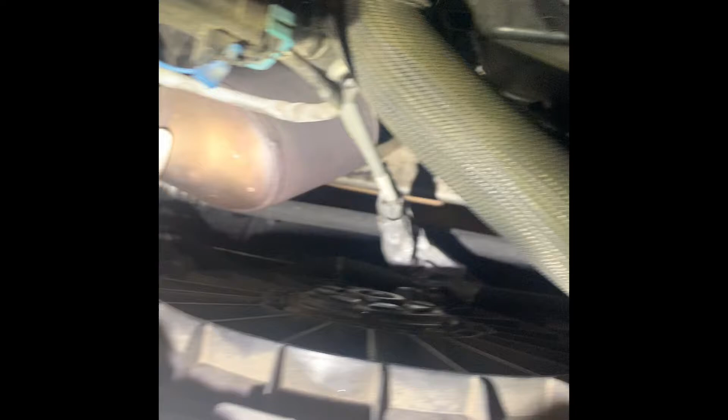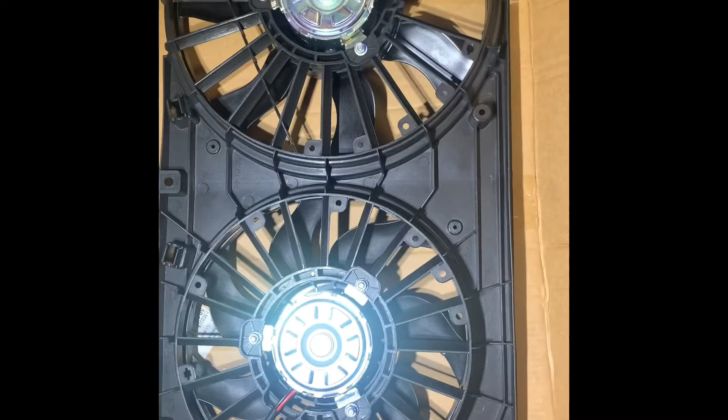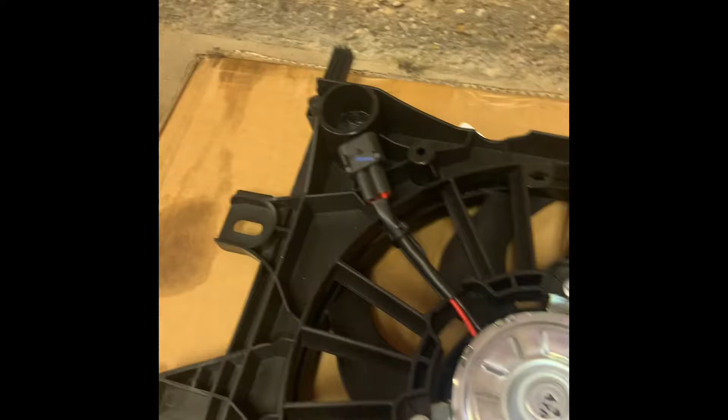620974. So basically this is what you're looking at, whereas this is the back side, so going that way, front of engine. It mounts at a few different spots. So you have the top here and the top there are very easy to get to. Those have these brackets, these hold down brackets. Right here. It only came with one, but I'm going to reuse one. They're just plastic parts, support brackets.

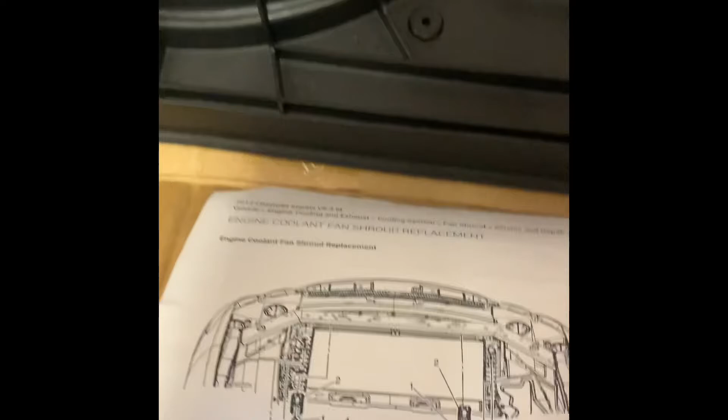So there's those two on top, and then looks like there's one here, one there, and then one up top center, and I believe that's it. Yeah, it looks like it's it. If there's anything else, I'll let you know. So to get to it, it's fairly easy.

I have, the thing with the 3.6 is you can get AC Delco part number PF63 or PF63E, and then I use K&N filters, so HP 2011 is the one that fits. The thing about getting PF63E or in my case HP 2011 is that it's an extra length on the filter, so it has more volume of filtrage, so you can pump more. You see how much clearance I have there, so not a lot. That's why I'm going to be doing an oil change while I'm doing this. It's a smart idea to just get them both out.

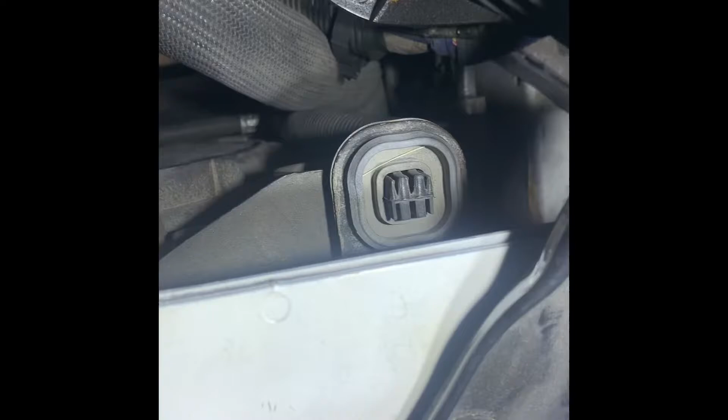To get this radiator out, you have to remove, so this is the front, and right there, that trans cooler line, lose some trans fluid. There's going to be a C-clip, I believe. So that, and then it bolts down there. I'll get a better shot later of where it goes down, but you can kind of see right there is where it starts from. It runs down there, and it goes off to around the corner there. So I might have to drop the splash shield to get closer to it. But yeah, you definitely have to remove that because that is solid aluminum. You can't do anything with that, and it's clearly in the way.

Now, you also have to remove this torque strut. That's fairly easy. I don't have the torque specs on hand, but yeah, to remove this torque strut, you would remove here, and here, here, here. You don't do anything with this. You just remove those two. Those four really. But yeah, so just the trans line that goes to the auxiliary.

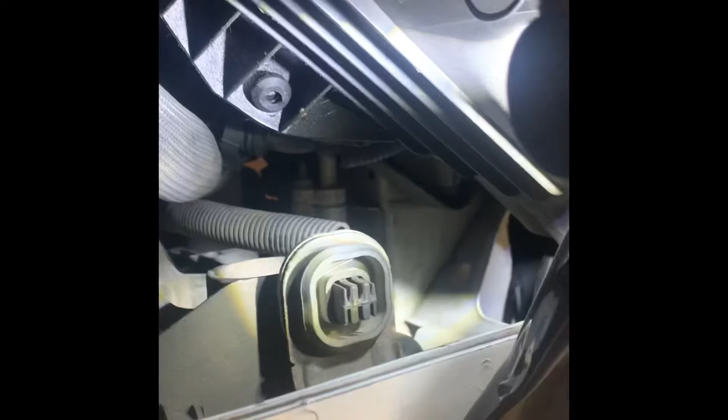This is a police package, so it has 3 different trans lines. You can see where those two are on the trans right there. There's one, and then the other one is in the rear. You can't see it, but if you have the one that goes all the way back there to the rear, that is for police package only. Because this thing right here is the auxiliary. So I actually got it easy today. When I replaced that line all the way to the back, that was a pain. It's very, very difficult to get that back in there. It's easier to get it out because you can mangle it and stuff. But yeah, so right here should be fairly simple.

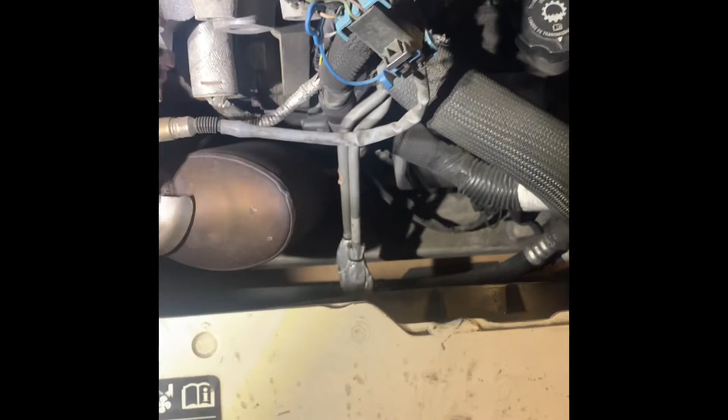I'm going to be removing the air box. I'm going to be removing the torque strut, and that should give me enough room. Yeah, and obviously the oil change. So first 2 steps, you got to remove this engine cover just to get it out of the way. To do that, you just unscrew this oil input cap, and then remove that, set it off to the side, and make sure you put that back on, so you don't lose it and we don't get contaminants into the crankcase.

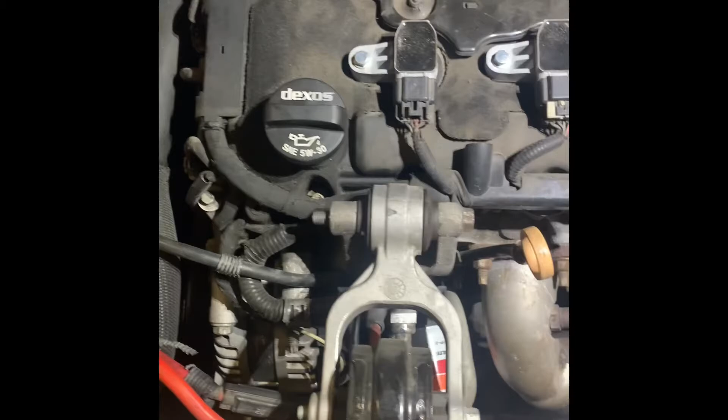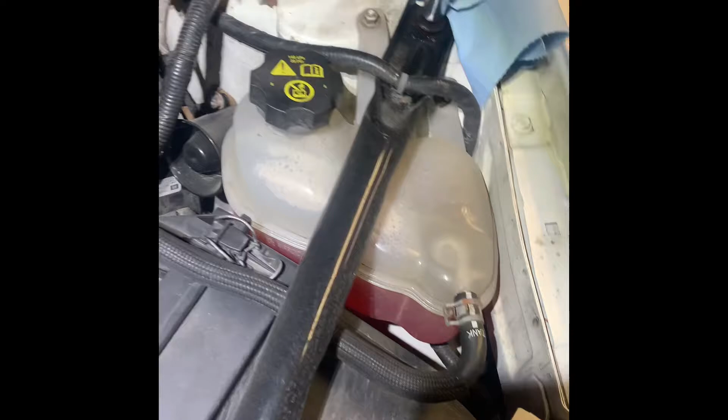And then we got this support bracket so we can remove the air intake. Step one would definitely be to get that support bracket off. That's either a 1/2 inch or a 13 mil. And I already cracked those bolts. You know, I use that Free-All to kind of clean up the threads and make it a little bit easier. Don't want to do that. So yeah, that should be all good.

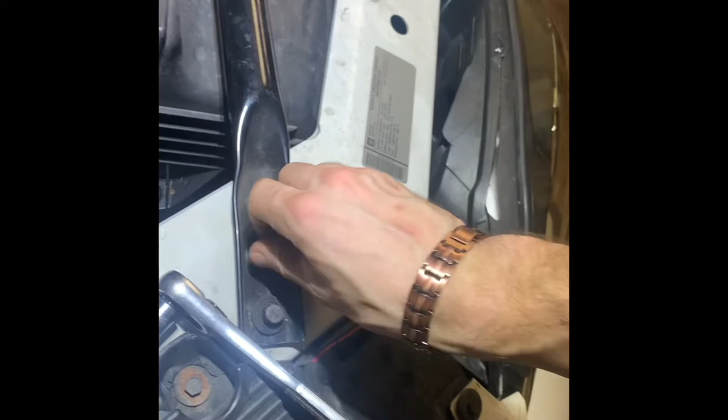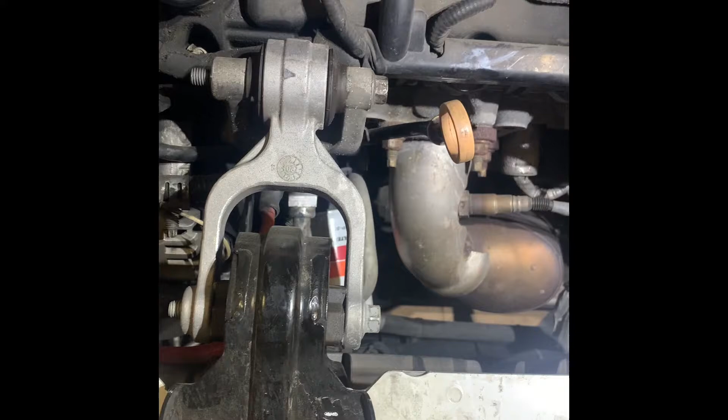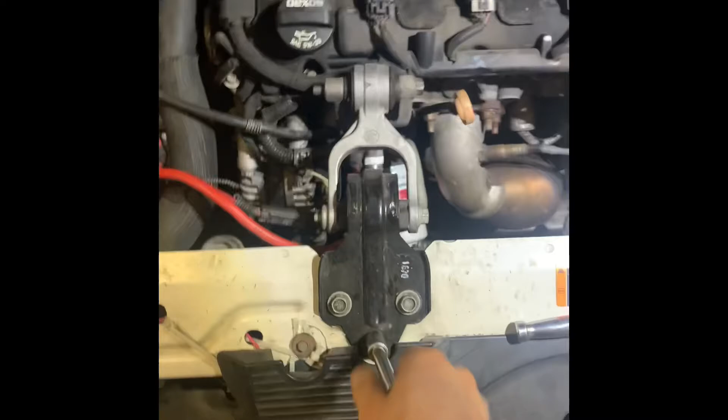There is this snap tab right here. I don't know what connector that is, but you gotta take that out. With the torque strut here, we have a 13 millimeter down below here, or a 1/2 inch. We have a 15 mil here, or a 9/16, along with that and that. Those are all 15 mils. And I already broke them loose. They're very easy to get to. Just remove them by hand.

I can do this one-handed. You can do it. You can do it. If Britney Spears can get through, what was that, 2011? You can do it. You should probably get a GoPro or something.

Anyway, so again, you want to keep these organized. We got the front out here. These are very long bolts. I'm going to keep the 3 of these together so I know where they came from. We got 3 bolts going with 3 bolts.

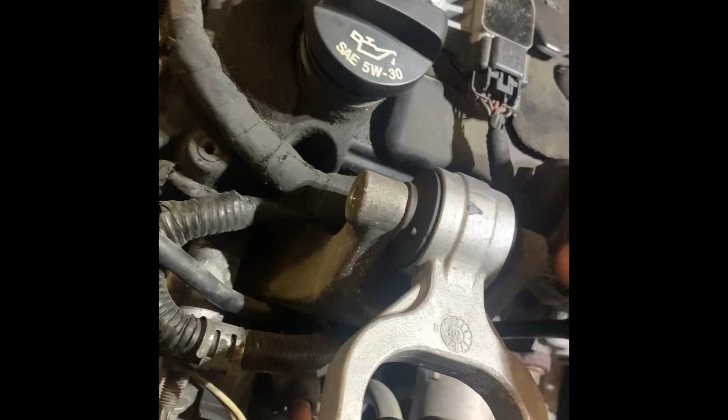And then for the top here, I got this swivel socket. It's only going to get easier. Should be out now. That's fairly easy. All I did was just break that loose and it should come right out. That slides out. That slides out.

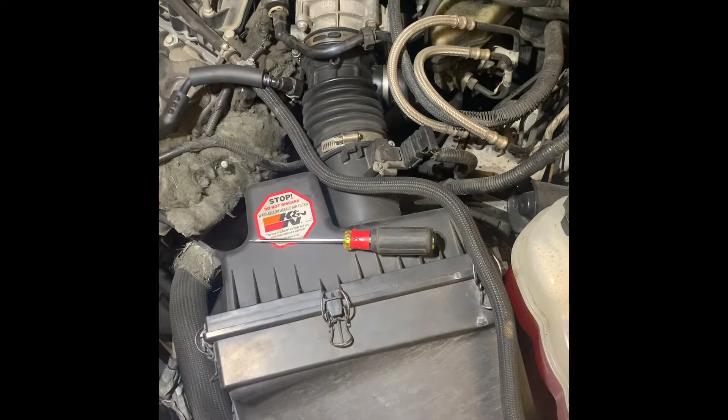Alright, to remove this air box, and I'm also going to be doing some different tune-up processes, we got to take off where it meets the throttle body. So right here, you just sneak in a flathead and get that rolling. I don't ever remove the purge valve solenoid. That connection is kind of a pain to get to, and it's right there, so I don't want to worry about it too much.

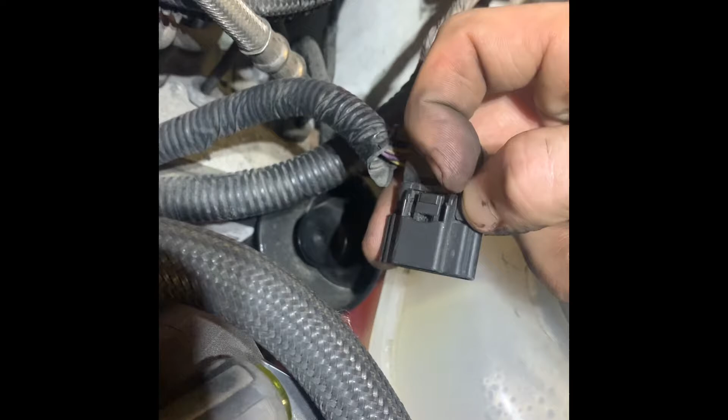Remove this little tab here. This is the PCV valve, so you would just click this little gray tab and slide that off, get it out of the way. And this is our mass airflow sensor. There's a tab on the back side. It's probably got one of those red guides, but it's broken off by now because, again, this is like, I don't know how many times, but you would just pull that red back, and then with the electronics on the left side, you're just going to click that tab, pull this off, and that should be it.

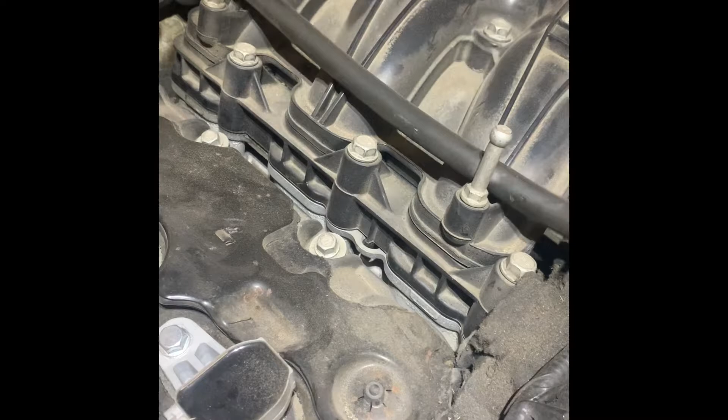Easiest way to do this, probably get this off so that the tube is removed from the throttle body. Make sure I'm not missing any steps here before we go into this. All right, so then we got 1, 2, 3. And this coolant inlet, the proper way it runs over that and under this. We can move it out of the way for this process here. Got everything removed. So we got that part of the box off. Setting it to the side.

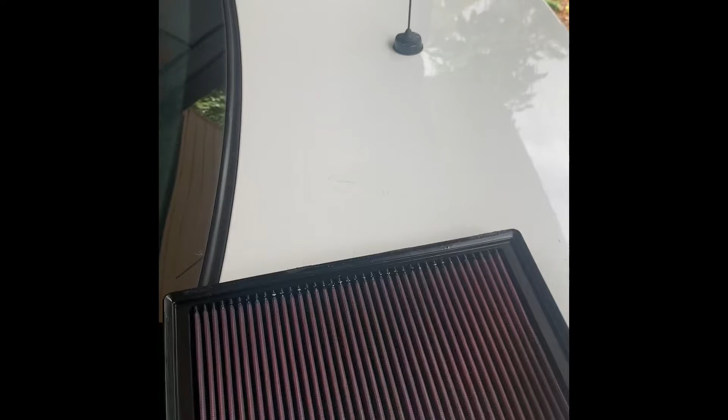And this is my reusable K&N air filter. I can see light through it. I'll probably run it for like 25,000 miles. I might clean it today, I'm doing all this other stuff. But yeah, it doesn't really need it. Just probably tap it out on a hard surface. It's my car. I can do what I want. That's how you get debris out of an air filter. Cool.

So, now this backside, it's got little grommets. I'm gonna just get it out of there. Those little grommets, 1, 2, 3. One of them's kind of messed up, but yeah. All right.

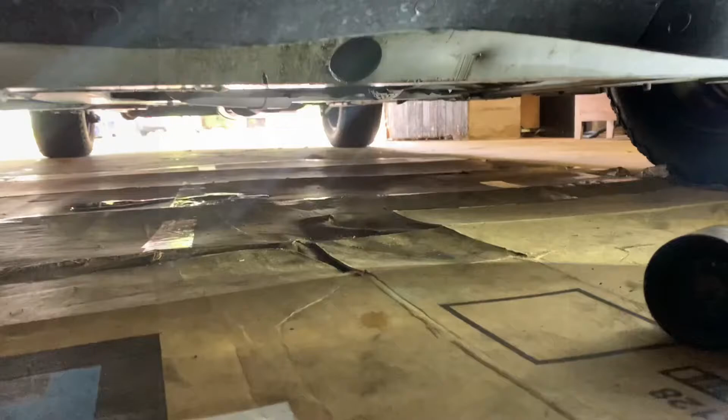Next thing I'm going to be doing is an oil change. Lifting on this vehicle is fairly simple. There's that circle right there. That is the subframe, also known as the cradle. And you're just going to position your jack on the flat surface behind there.

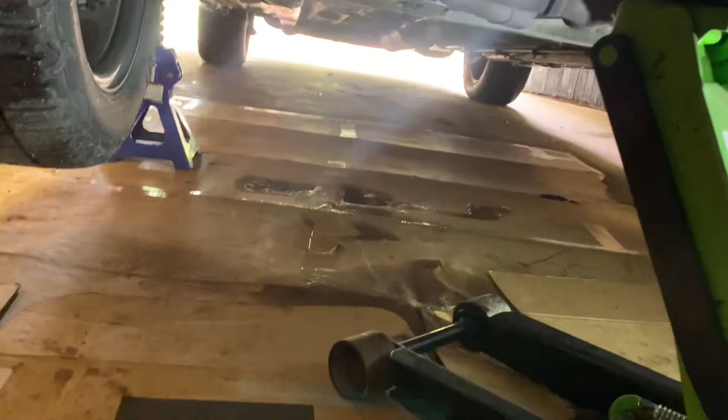So I'll show you here in a second where I position those two jack stands. It's always nice to put things in threes. Just gonna slowly let it down onto those jack stands. And it's still being supported at the front and the rear. Now the weight is on the jack stands as well, enough so that if the jack were to fail, it's still on those jack stands, but the weight is distributed. It's the same on the other side. The pinch weld is double bonded here. That's where you want to set your jack stand.

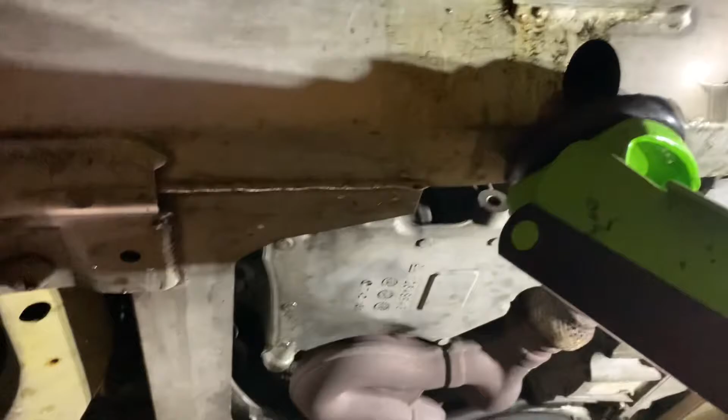Alright, so that's the drain pan right here. And this bolt right here is a 15 mil or 9/16. And I am replacing it because I saw a little residue around it, a little drip maybe seeping through the seal. So I'm just gonna take that off. Position your drain pan. So if it's dropping straight down 90 degrees to the floor, it's gonna catch it. And about dead center, so as it initially shoots, it's gonna catch it. Here we go. Bingo.

As far as fluids and supplies that you will need for this job, at least 6 quarts of 5W30. I've been using high mileage full synthetic since I got the car at 88,000 miles, and I'm pushing 160, so no engine problems as far as lubrication. So yeah, I would say high mileage full synthetic. This is a new filter that I'm trying out, K&N 2011 versus HP 2011. Only difference is the case of the filter. It no longer has a wrench-on option, but you saw the clearance in there. There's no need for the wrench-on. I just need to get a good grip on it.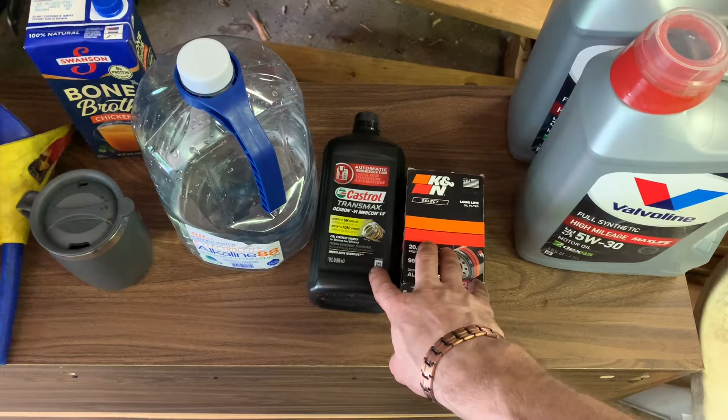And I normally use AC Delco Dexron 6, but it should only lose less than a quart, so I picked up this full synthetic Castrol Transmax. Make sure it says Dexron 6 on it, and got my fluids. So yeah, that's all you need.

To remove the oil filter, it's either going to be a piece of sandpaper, or they have those crimping pliers. If you got the grip strength for it, it's better to just put your hand on it and get it off that way. So yeah, this is already broken loose. You're gonna lose fluid. I jammed some shop towels behind there. And as soon as I pull it off, you'll see what I'll be doing. It's gonna be turning it upright so it doesn't spill any more than it needs to. And that wasn't a great job, but keeping as much of the fluid in there as I can.

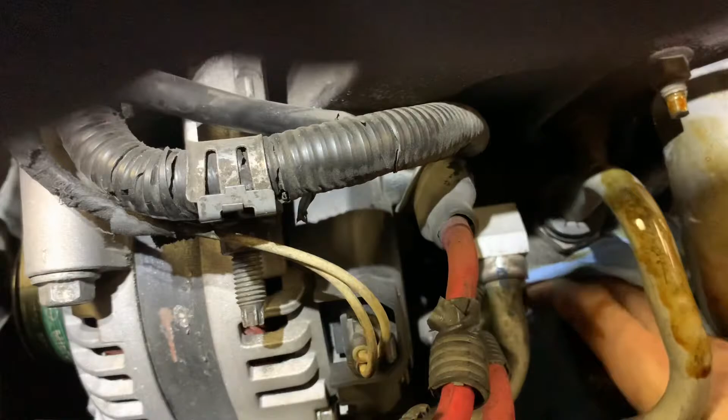My plan throughout this whole process, since the oil filter needs to stay out, is to just cover this with a shop towel, to avoid any contaminants from getting in there. Just get it covered. It's not a bad idea. And after this whole thing, you definitely want to hose this off with some brake clean. I'm not going to do that right now because I don't have anything covering that hole, and I don't want brake clean in my engine.

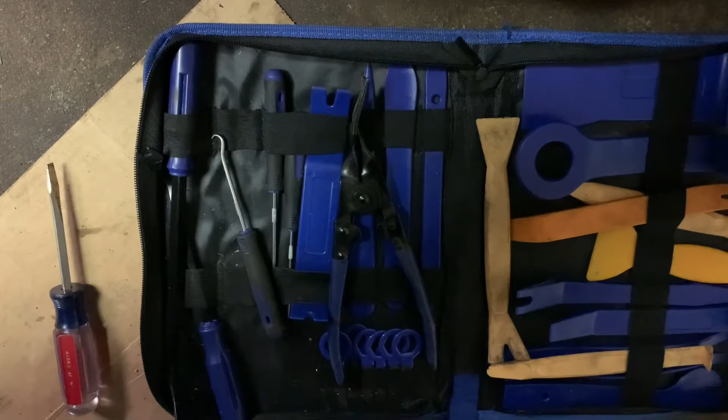Yeah, so I got the oil filter out, got it draining. Next thing I'll be working on is that trans cooler line. And I'm going to try to start at the bottom. That seems like it's going to be the harder access area. But yeah, definitely need some picks and a tiny flathead. So this is a trim removal kit. I do need to take off the splash shield to get to the bottom of the trans coolant line. And yeah, got a flathead there and the rest of this trim kit.

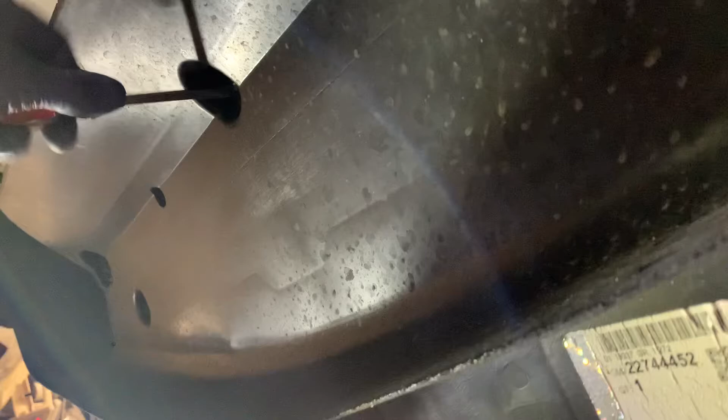There is a third flathead right here, another screw. The rest of these should be like snap tab, Christmas tree design. I got 1, 2, and 3 right there. So yeah, right there, 2 and 3. And those are held on with actual screws. So yeah, fairly easy. It's important when you're doing this to keep everything together and don't let that happen.

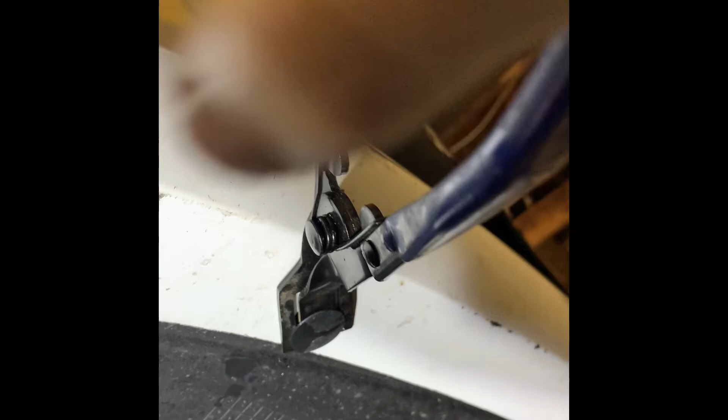All right, so there's several ways to get these off. Gently removing that first part and then getting it underneath there to just pop them off. You got a big one right here. To get under that. Make sure you don't lose those as you gather them. Try to keep them together.

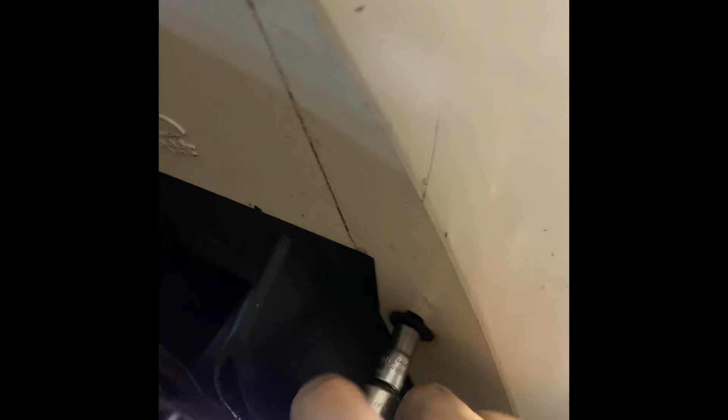Yeah, so these ones right here, and right here, and that's right in front of the wheel. It's like that on the other side. These are going to be 7 millimeter or 1/4 inch, and they come out very easy. It's just holding 2 plastics together. Being stubborn. That's it. So now that splash shield part is off.

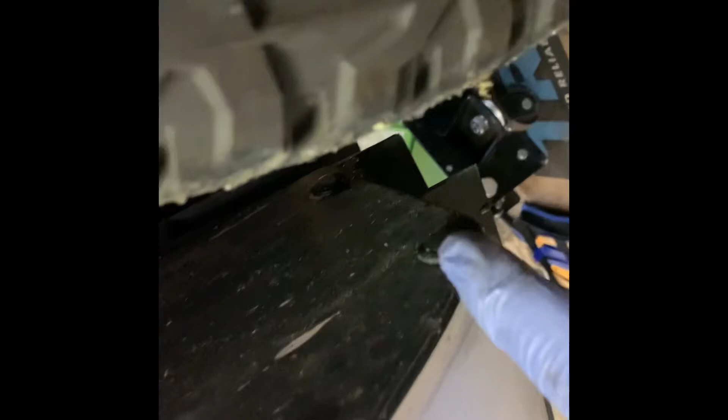Yeah, inside here on the wheel well, it looks like it's being held right there. So we gotta get those off as well. But I think it only goes to these top 2. We got 1 and 2. So I need to make a note of 2 additional fasteners.

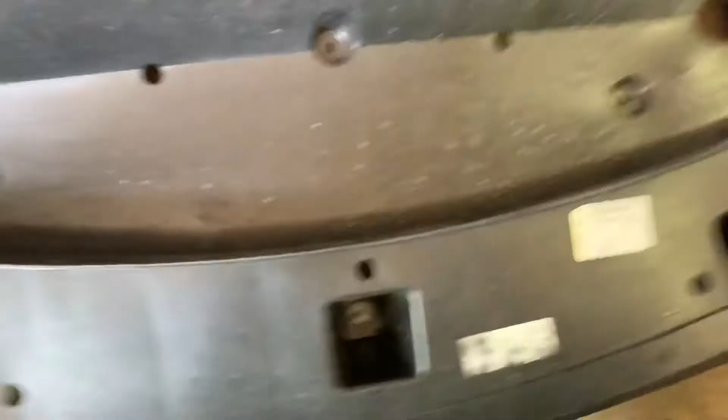This is the splash shield, completely removed. But there is this right here. This is in the complete center. And it's got like a snap tab fashion. This is the tool I use to get in there. It's very deep. But you go in there and remove this piece, go straight out with it, and then in conjunction with this piece, I was able to get in there and remove that as well.

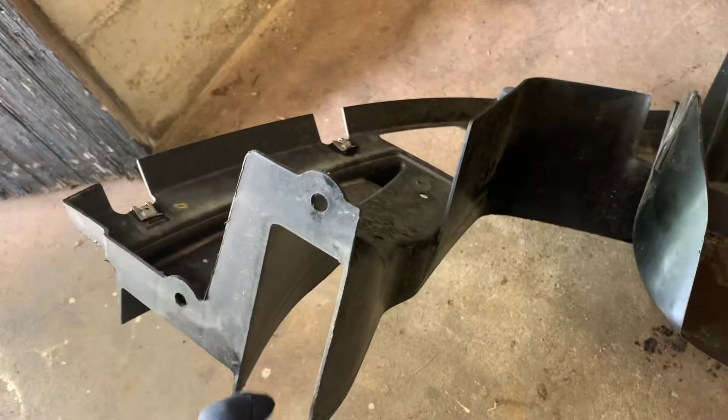The other 2 fasteners in the fender, this actually goes up higher. So we had where they drill in, we remove those with our 7 mil. And then there was a snap tab here and a snap tab here. So this is actually inside the fender. But yeah, with those removed, I was able to get this thing out. Next, I'll be working on that trans cooler line.

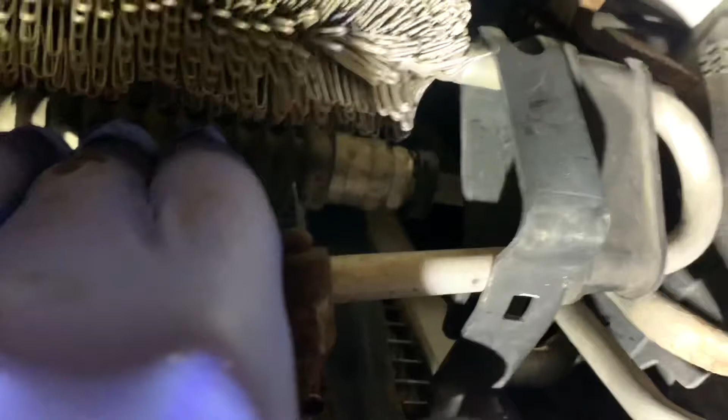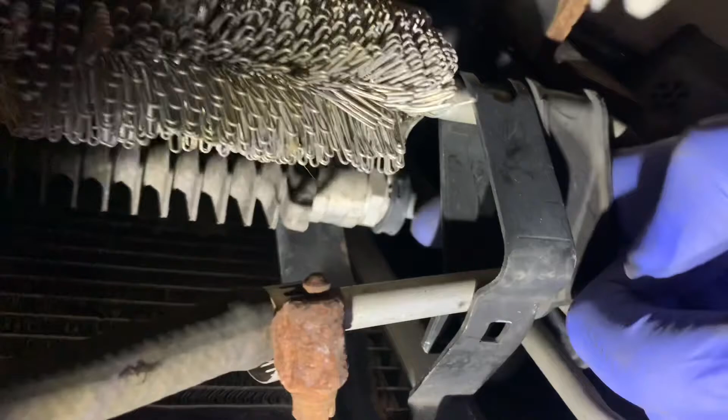All right, so with the splash shield removed, this right here is the auxiliary cooler for the police package. This is bolted to the radiator support assembly. Basically, this is where it goes. There, that's it. This is a power steering line, power steering cooler. That's what we're looking at right there.

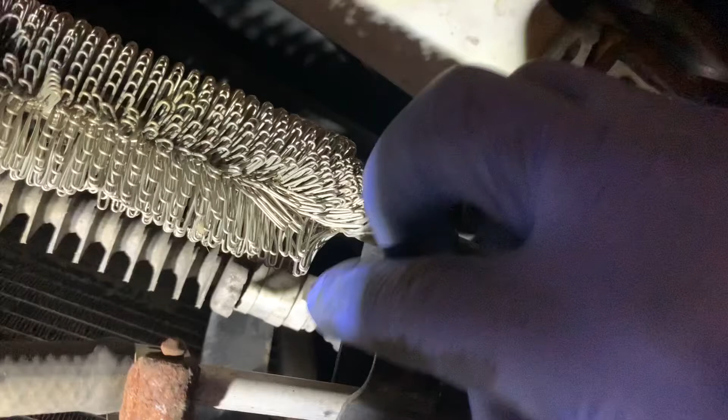So to get that out, you take a flathead and stick it right there and pop this off. And then what you have here is a C-clip. And they're very easy to lose. I'm gonna attempt to do it one-handed. This is a way better view of what I'm working with here.

And that's it. That is called a C-clip. Now the line should come right out. And when I do this, we're gonna lose some trans fluid. So I'm gonna leave that in for now. I'm gonna try to do this in one smooth operation. That's how you remove the C-clip for that. So now that we removed the bottom C-clip and it's ready to get pulled out, you have the top that's right here.

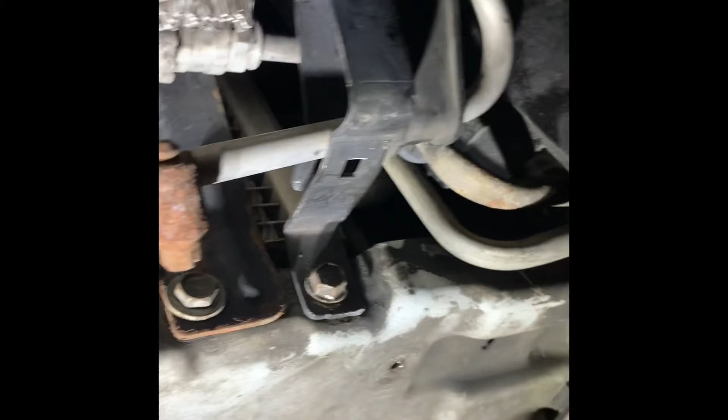And that is where you need the drain pan. So here's that auxiliary line for the police package. This is the top and this is the bottom. And to get it out, I folded this part down and out, and that pretty much just fell out. So fairly simple.

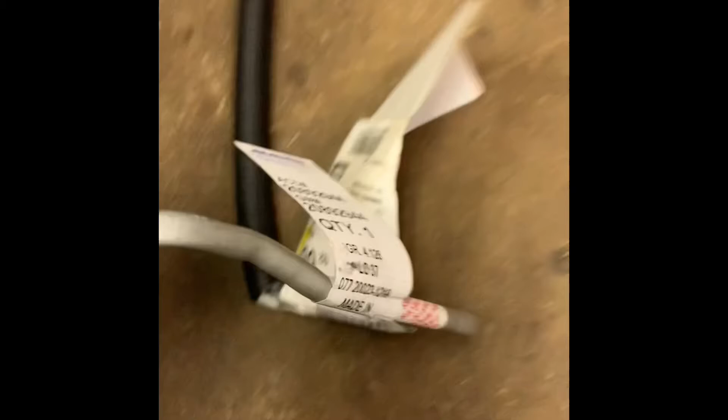So it's nighttime now. It took me an hour to go down to a dealership that had this cooler line. I got it. It's AC Delco part number 208-92944. I got a brand new line because this one was showing significant rust along the line. I replaced the other two already.

Again, the police package has two different lines. I believe it's the output and the auxiliary that are different. I believe the input line to the trans is the same with police package or LS, LT, LTZ. So yeah, those are the two lines.

This is what you do to clean the mass airflow sensor. This is a CRC product, mass airflow sensor cleaner, and that is just to clean. Right there is where you spray it, and then it's got like another outlet right there. Those two little boxes, you just spray it once for a good 10 seconds, shake it out, and let it air out.

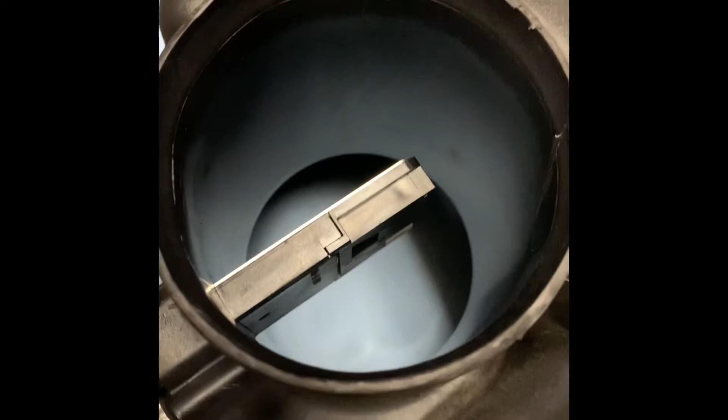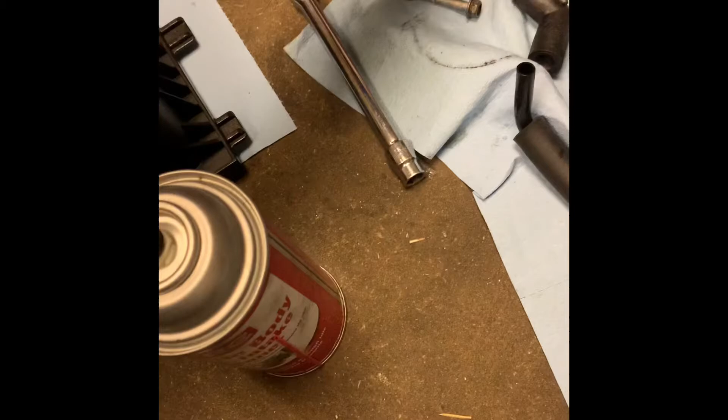For here, over here, we have another CRC product, throttle body and air intake cleaner. That's great for cleaning out this. You can wiggle this tube off here. You can wiggle that off and clean out, you know, literally wipe it. The outside is kind of dirty still, but the inside is fairly clean, cleaner than it was.

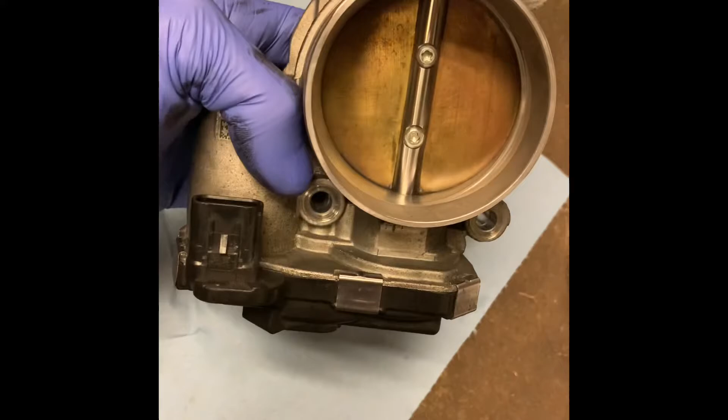For the PCV valve, positive crankcase ventilation, you just do the same thing. Take this stuff and just spray this hose out, wipe it down. It's pretty straightforward. This is the throttle body. Same thing, just spray it, wipe, you know, wiggle it, make some room. Yeah, I got all the carbon deposits out of that. So I got those as clean as I want them.

All right, we're gonna be moving on now. These, again, you're looking at a 10 millimeter to take these off. Basically, 10 millimeter is also used for all these nuts. So there's one of the support brackets right here. There's the other. There's the middle one right there. And it's the same on this side as the other side. So those are all 10 millimeter.

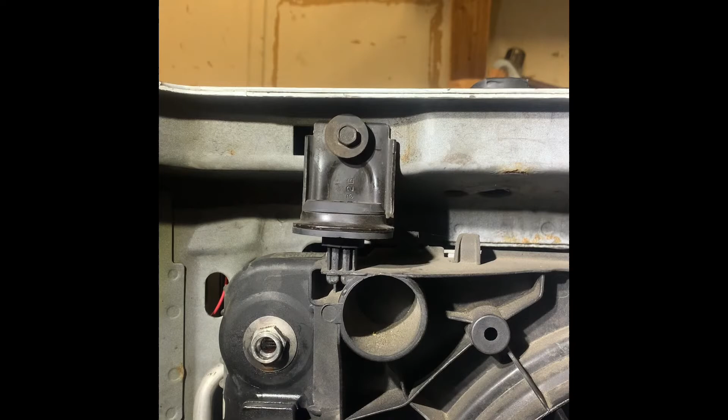So that is showing where the bracket is. I'm gonna take those two out now with my 10 millimeter. Right there. Right there. And right there. So you want to leave these plastic retainers in for now.

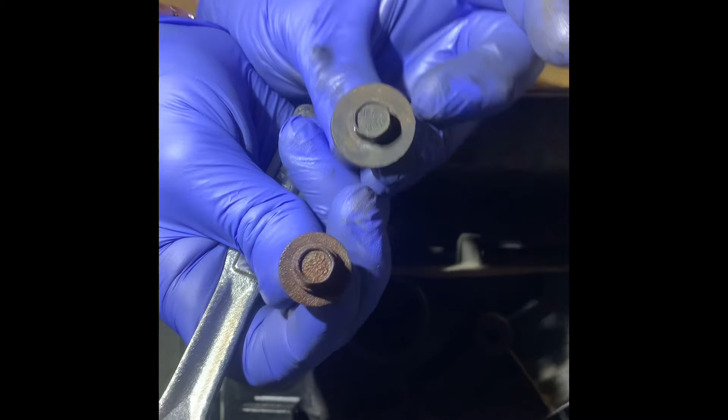And it looks like these washers are completely different. So you have a smaller washer on the bottom, a bigger washer on top. And I'm actually going to lay these out exactly like this. Yeah, so this support bracket is not moving. Leave it in there for now until we get there.

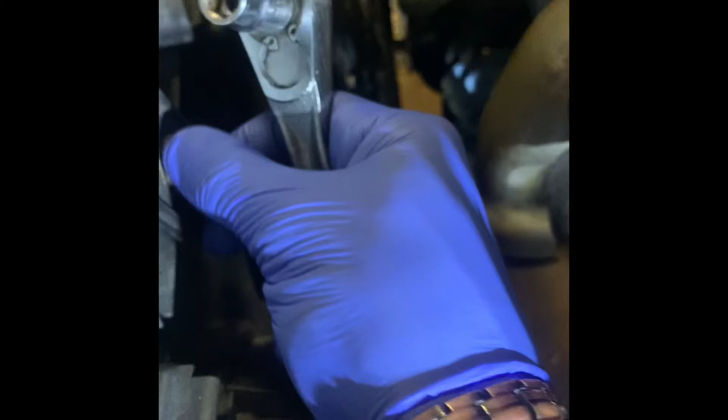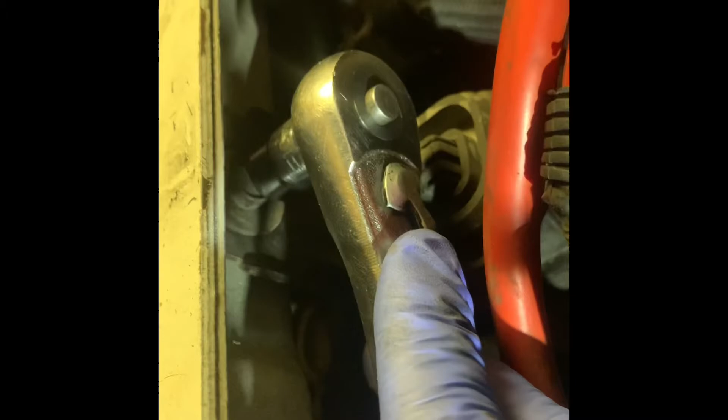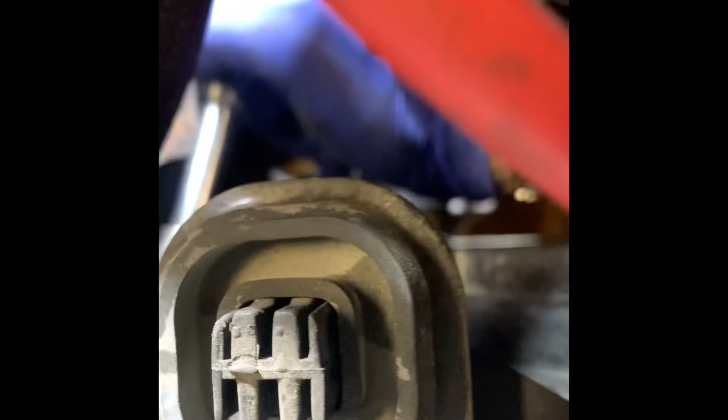Next we got this right here in the middle. And that comes off. Now these bolts are different, so I'm laying them out in an organized fashion on the ground. Coming over here. So there it is with a stubby extension. It's about a 3-inch extension. I'm able to get around underneath this radiator hose. Use it kind of like a screwdriver now.

This out. So this is the bottom. So we'll take this in the bottom. This is the top. This is the bottom. This is the top. And this is our middle bracket. Middle bracket. Bottom. Top. So it's laid out in a nice orderly fashion.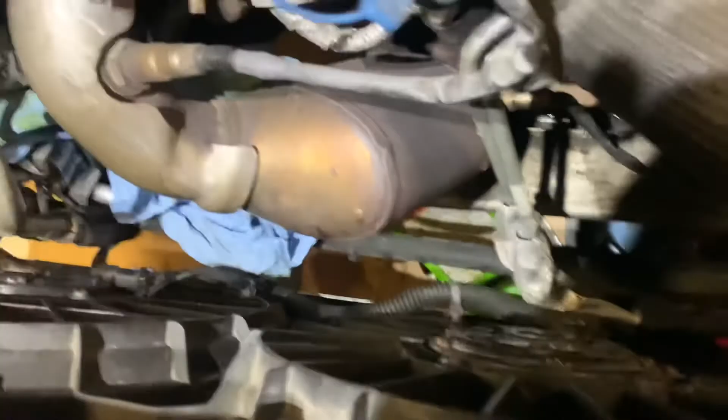So it looks like we got these electrical connectors now. And first we gotta take out these tabs. So gray one disconnects there. Gray one down below disconnects there. And it looks like there might be one more. Yeah, so that connector is disconnected all the way around. And it doesn't look like there's any locking tabs, so that just comes right out. I'm gonna drop it down below so it's out of the way.

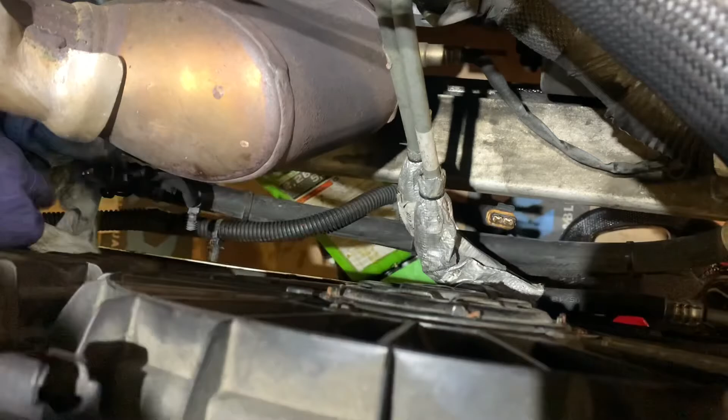Looks like there's one more connector tab to the other side. And that one came right out. So it looks like we're good to roll. I'm taking off these two brackets right here because I got some room that we couldn't get to earlier. Two brackets. And I'm setting them where they need to go. Should be good now. That's it. Success.

Alright, so I'm going to sneak this other one in. Be careful of the backside because that is a radiator, and if you damage any of those cooling fins, the radiator's, you know, not as effective. So I'm just going to try to get this in without even touching the radiator.

That's it. Back in there.

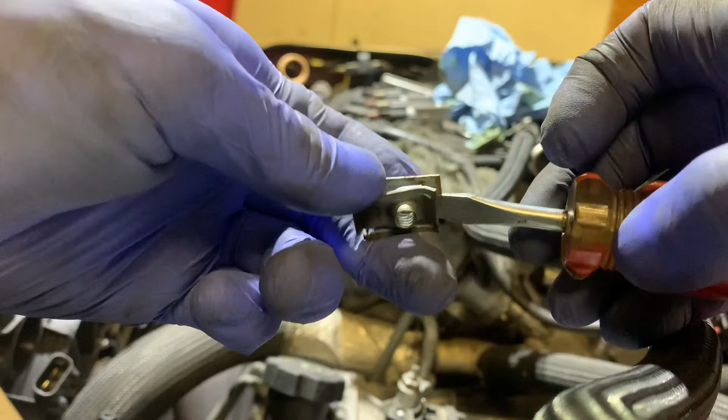I'm going to start with this middle one. So Dorman kind of cheaped out on this part right here. This comes out of that middle part of the bracket. I just took a flathead and pressed on this pin right there. And while I'm pushing pressure on it to slide it off, actually it's right here where the lip opens up like that. It just clips on. And if you just take a flathead, push that back gently enough for it to clear the area, and then with your other finger on the back side, just pop it off.

It slides right off. And to reinstall, just find the area right there. And clip it right back on. Yeah, that's it right there, where the flush side is on the outside. All right, so reinstalling the bracket.

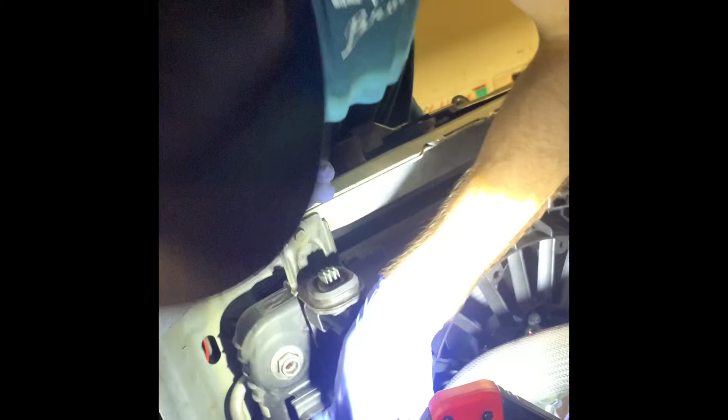Next are the bottom ones. Alright, so that's the bottom piece right there. And I'm going to line them up. Easy money. Same on the other side. Sneak under all that electrical stuff. I had to push it up to get into that spot. And that's in. So everything is loosely connected. Ready to tighten it all down.

So these are our torque specs for the procedure. We got 10 Newton meters for the radiator bracket upper support bolt, that is 7.376 foot-pounds. And then 6 Newton meters on the fan shroud bolt and the condenser hold down bracket. Those are both 4.425 foot-pounds.

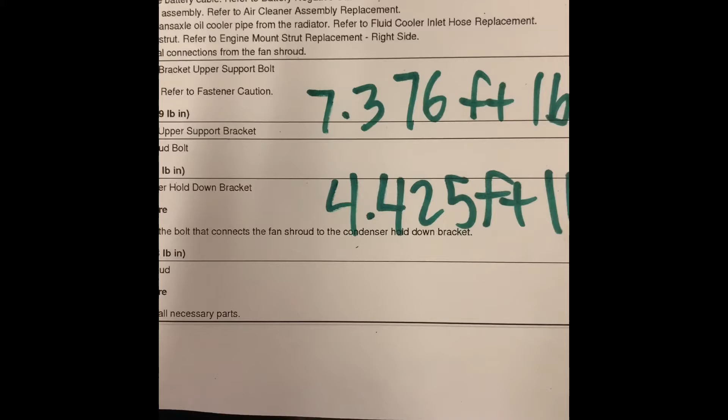So it looks way different in my car than this model. I had to break a tie strap here because, this is the left side of the vehicle, they had it coming up here. This is a Dorman part, so I don't know what's going on. But I had to break a tie strap here and route it this way. So then it goes down here, and I zip tied it to another hole right there. So it's out of the way of the fan, the exhaust, the trans, and it's not moving. It shouldn't be a problem. Everything has protective on it. And then I put all these other snap tabs into place.

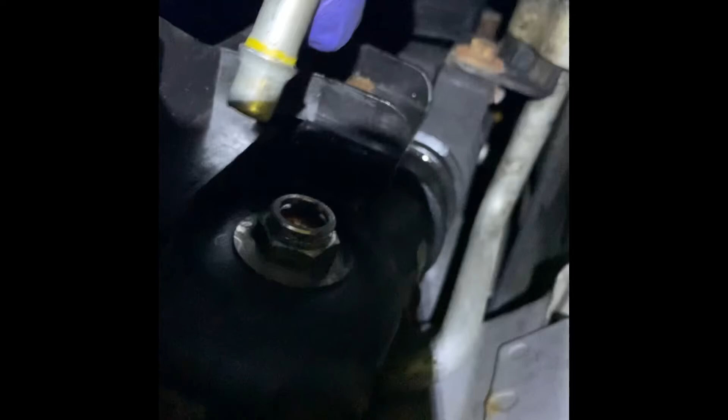Alright, so our trans cooler line that we removed, I had to get it in place here. You got to work the top to get it somewhat over the radiator. You get that over here, and there it is. So you just take that and get the tube back into that auxiliary cooler. You should hear it pop, click in. All right. That looks good. It's in there. That's a better view of what we need to do. That's all it is.

So I lost the C-clip in the process, and I found it. It fell straight down, and I ended up having to take out all of those 5 bolts just to get under the radiator. So I got the bottom one. I'm going to show you how to properly install it. You gotta really hold on to it, make all your moves very intentional, very solid moves, and it's easy to get it in 2/3 instead of 3/3.

So once you get one in place, you got to really hold on to it tight and stretch it up and over. If you see, there's one little divot right there, and then there's 2 more right there and there. So basically, imagine a circle cut into 30%, 30%, 30% with 3 walls in between those thirds, and you have to get up and over one of them.

It's really easy for this clip. You see how it's designed. You can get 1 in and 1 in, and then it's stuck, and then you got to slide it back out and try again. So just hold on to it tight and get up and over one of those humps to get completely in. It basically just locks the line into place, and don't lose it like I did.

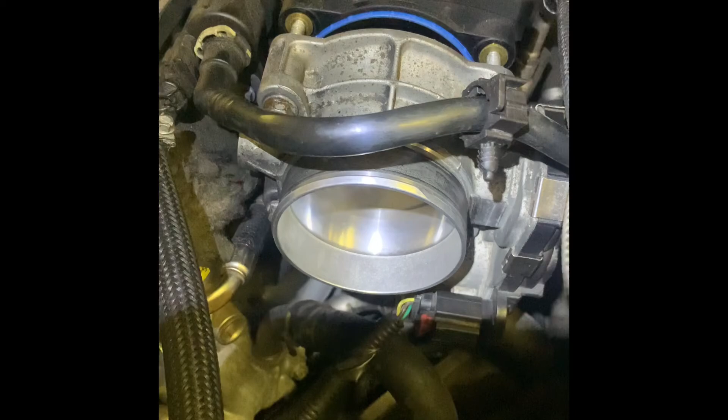The throttle body bolts are 10 Newton meters. 10 Newton meters is also 7.376 foot-pounds.

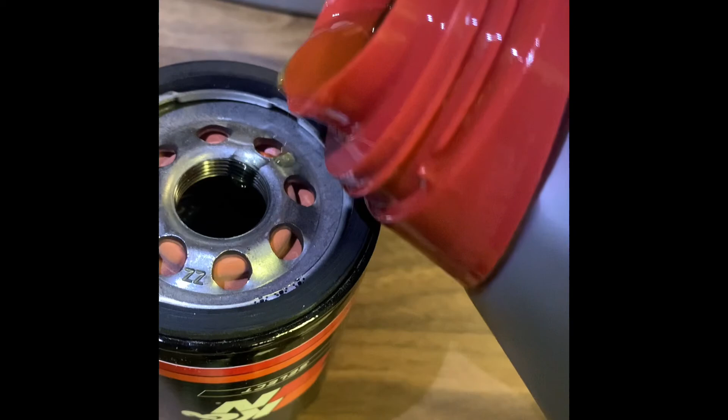This is a trick that I like to do when I'm doing my oil to get a startup that's clean and somewhat lubricated. What I call wicking a filter. Just add a little bit around the edges, and that's it, and let it soak in.